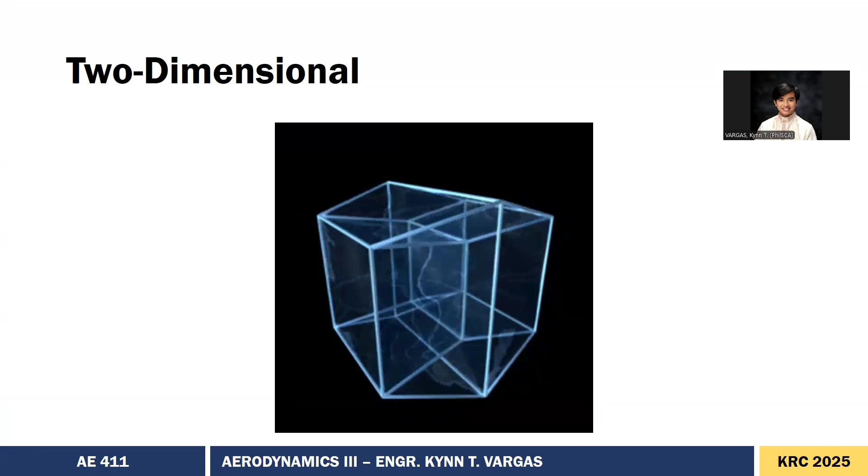So for our finals topic one, which is the two-dimensional characteristics. So what is this one? So for two-dimensional, what do we mean by that? Na-encounter na natin yun dun sa ating oblique shockwave. So, in reality, di ba, three-dimensional flow, but for simplicity, we use such theories. So, first is yung exact theory where expressions for the change in pressure through an oblique shock wave in 2D supersonic flow is generally considered to be exact. Pero meron tayong mga assumptions tulad nung dapat siya ay adiabatic, mga ganong expressions.

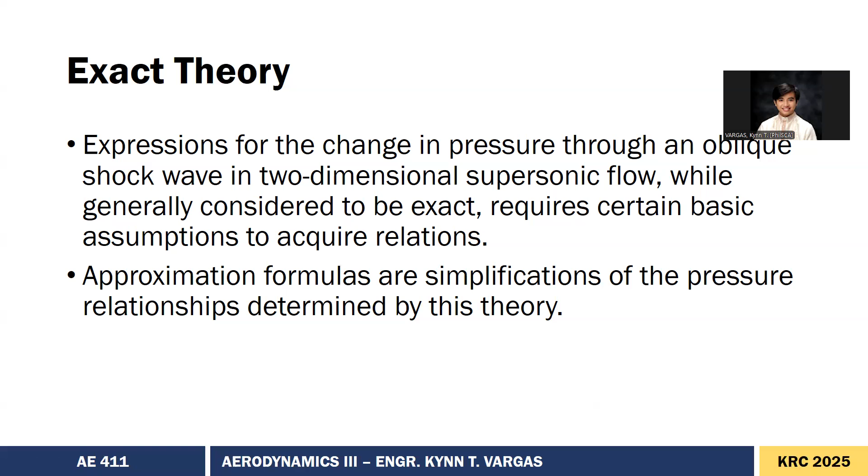But for approximation formulas, dito na papasok yung mga formulas natin for the tangential velocities and Mach and other tangential components. Whereas yung simplifications is mahahanapan natin ng some approximations. Hindi pa rin natin siya makukuha, the theory is exact pero hindi mo makukuha yung exact value. So ngayon, for the approximation theory, it focuses on the thermodynamic and aerodynamic concept, including the shock waves, Mach number, and designing for supersonic airfoils or wings.

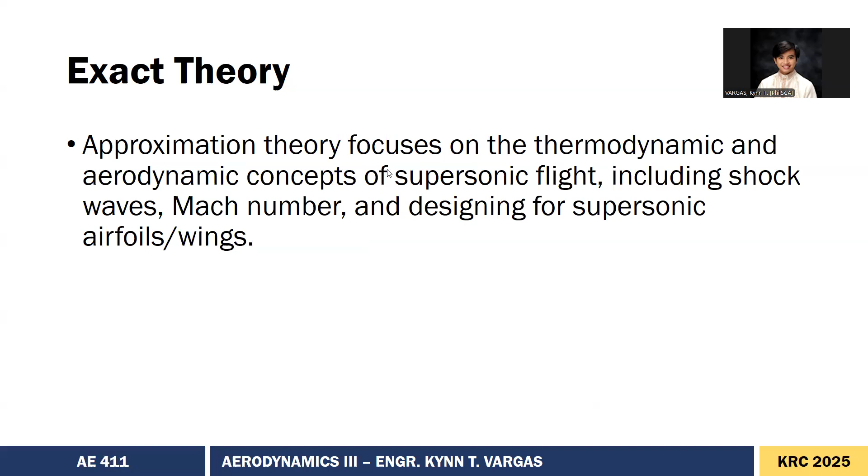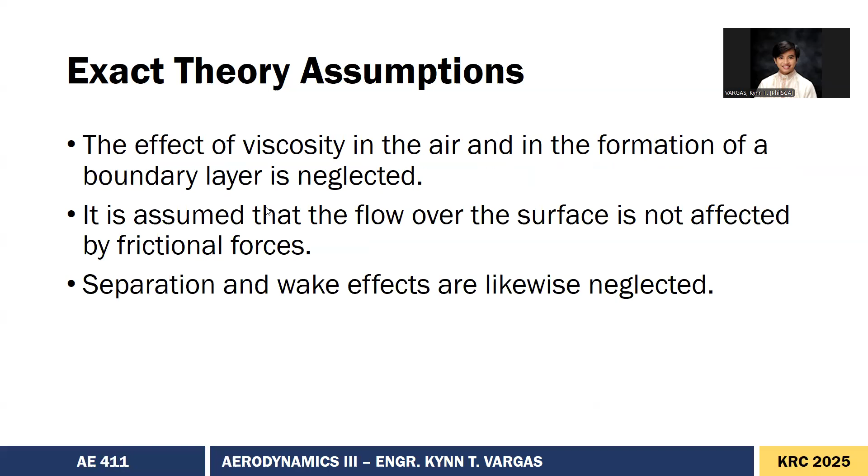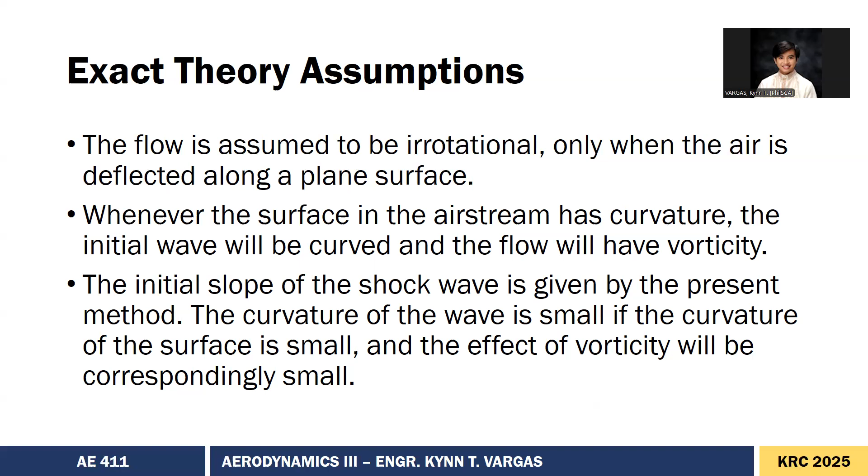Such assumptions include the viscosity is neglected, the flow over the surface is not affected by frictional force, and the separation and wake effects are neglected. Yan sa exact theory assumptions. Now, assume din siya to be irrotational, hindi umiikot, walang vortices, when the air is deflected along the surface. So, it follows the surface lang. Now, whenever the surface has curvature, the initial wave will be curved and the flow will have vorticity. And the initial slope is given in the present method, yung ginagawa natin sa midterms. And the curvature of the wave is small if the curvature is small. Alam na natin to. Intuitively, if nakikinig nung midterms, yung mga concepts na to, same lang rin naman.

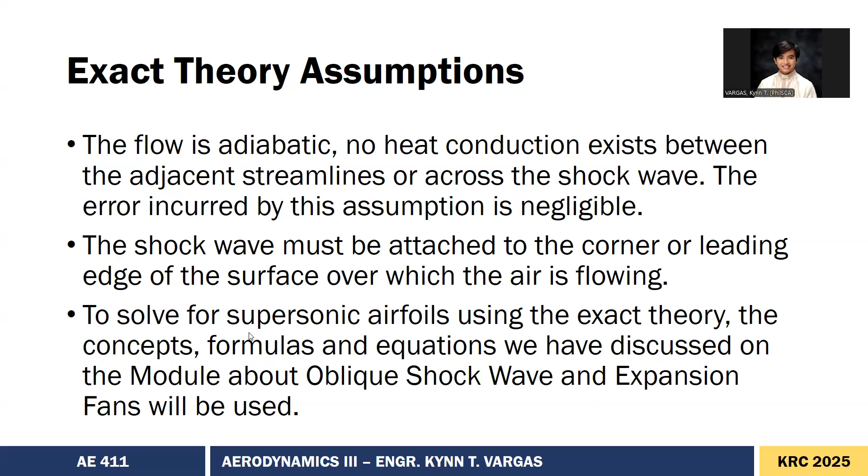Now, the flow is adiabatic. Paulit-ulit tayo doon. No heat conduction exists, pero anong meron sa isentropic na wala sa adiabatic? There's a possibility of the chemical reaction. That's why adiabatic lang siya. Now, hindi siya reversible. So, the shock wave must be attached to the corner or leading edge para sa computations ng exact theory. Ito yung sa midterms pa din. And to solve for supersonic airfoils, concepts, formulas, and equations ay nagamit na natin dun sa oblique shockwave and expansion fan. So, ano yung mga sample problems?

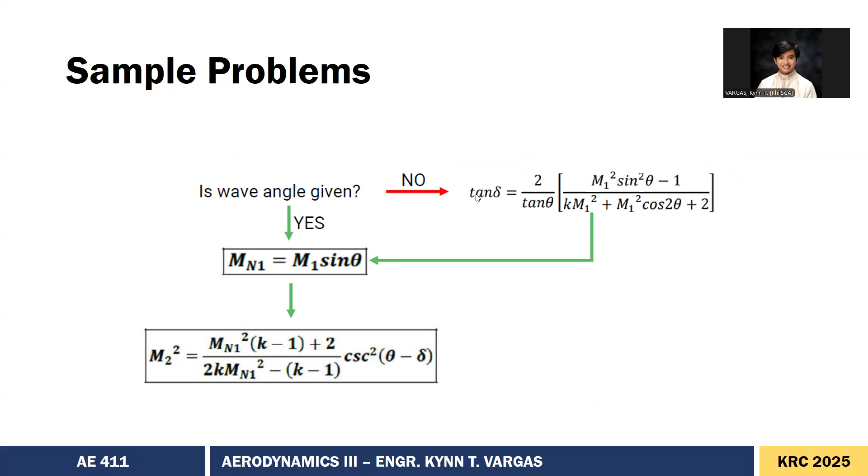Ito yung ina-explain ko sa inyo nun na pagsasamahin natin yung oblique shockwave and expansion fan. So, from here, ito yung una mo, oblique shockwave. Then mag-expansion fan ka pagdating dito sa ating diamond airfoil dito sa point na to. So, sundan na lang tong solving process na to, ito din naman yung ginagawa ninyo na. So, syempre, kunin muna natin si M2. Is the wave angle given? If no, kunin mo si wave angle. If yes, diretso ka na sa formula na to to get the M2.

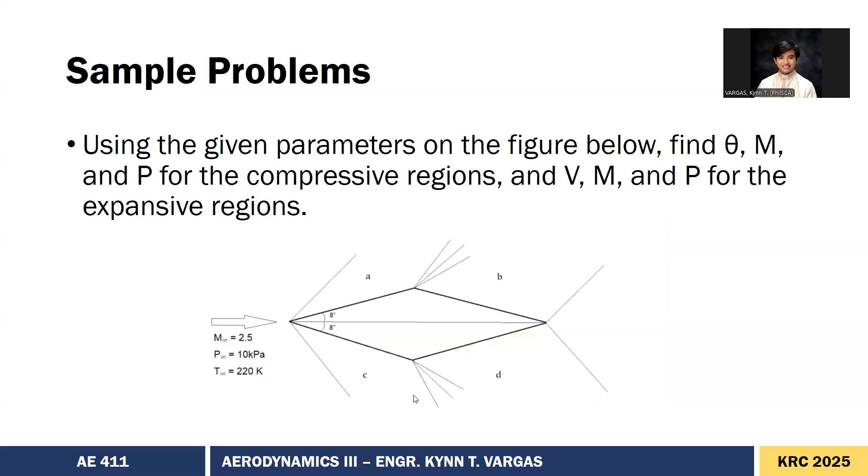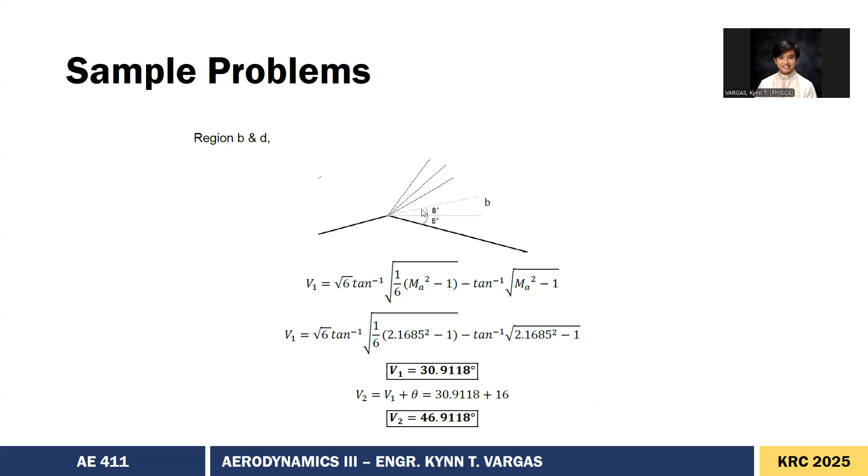Now, kukunin natin si for region A and C. Ito yun, taas and baba. Although, since equal to, parehas lang naman yung magiging value niyan. Kaya nga for A and C na. Kukunin mo muna si angle. Then makukuha mo si Mach number, si normal, papunta sa pressure, since pressure lang naman yung hinahanap. Then, not only pressure, itong MA, ito lahat na nakabox. Then after nun, ito na yung magiging ambient mo, ito na yung magiging start ng solve mo, which is yung M na mako-compute mo sa naunang oblique shockwave. Then dito mo na siya ipapasok yung values papunta sa Prandtl-Meyer expansion fan.

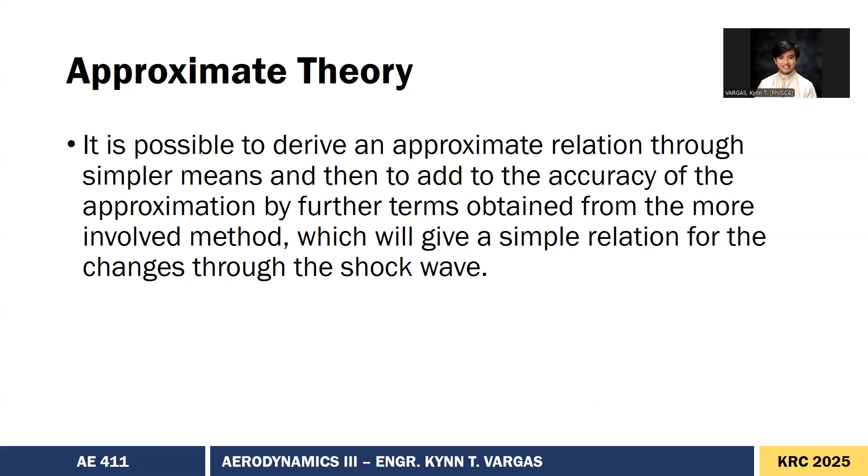So, ang kailangan ko sa inyo dito is automatic solver for calculator. Ay, for Excel. So, gawan nyo ng paraan. Nagawa na namin to before. Kaya nyo yan. So, ngayon, doon na tayo sa approximate theory, where tatansyahin na natin kung ano yung possible na values na pwede makuha kapag kasama yung mga forces na nineneglect natin. Now, it is possible to derive an approximate relation through the means of adding the accuracy of, i-add natin yung ma-approximate natin na value for that tangential component.

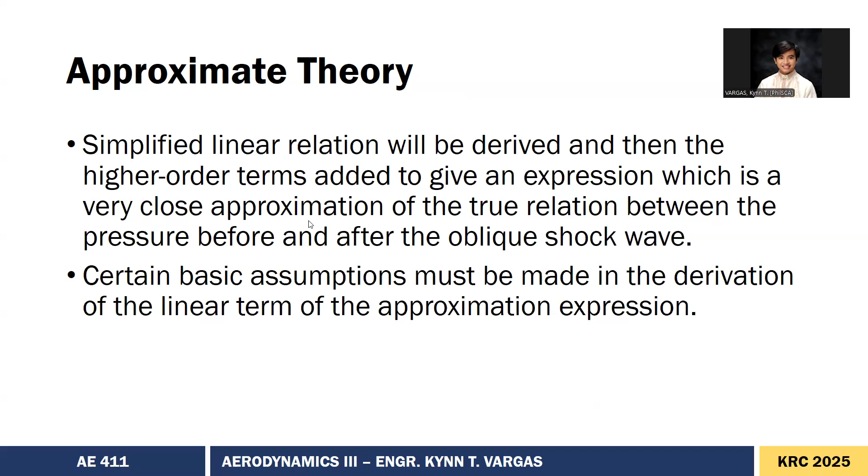So, the term detachment refers to the condition of the shockwave detachment because of Mach number being too low rather than because of boundary layer.

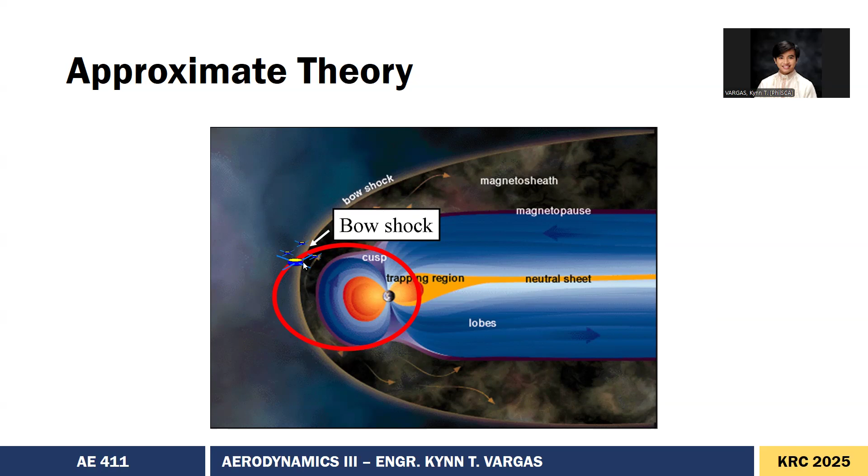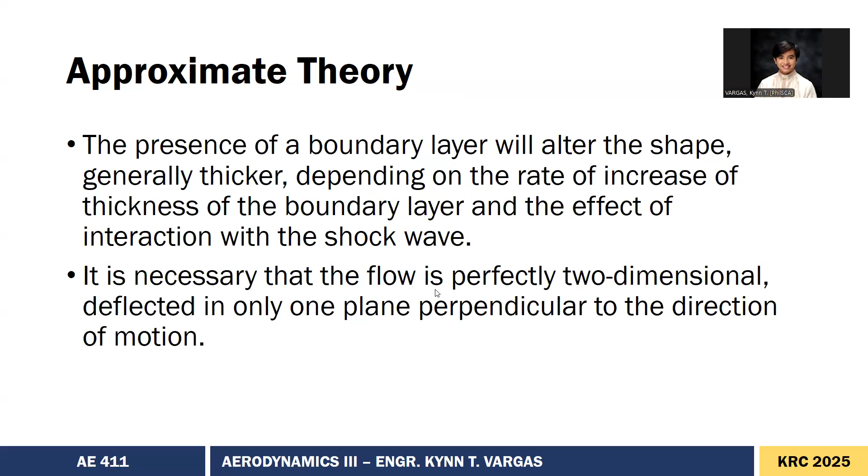So, the presence of the boundary layer will alter the shape, generally thicker depending on the rate of thickness of the boundary layer and its interaction to the shock wave. Now, it is necessary for the flow to be perfectly two-dimensional, meaning it is assumed. So, this method provides simple means of determining the change in flow conditions, particularly pressure distribution, to obtain the airfoil section characteristic, which is eto yon.

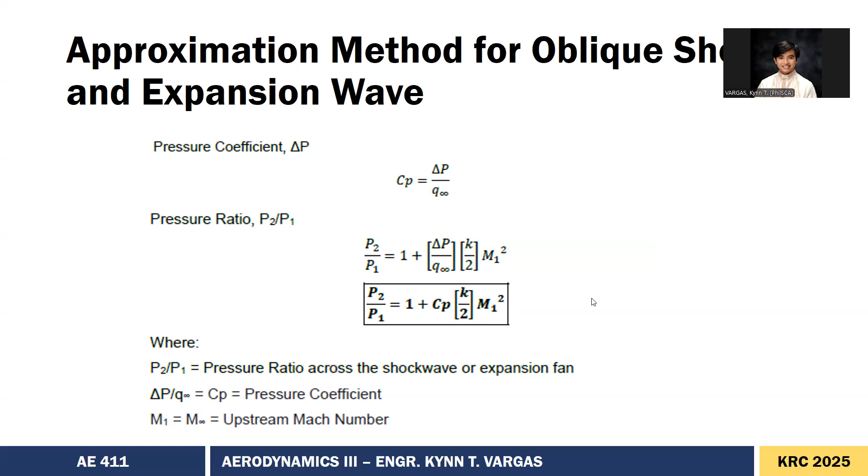Using the pressure coefficient to approximate the pressure ratio. So, nakukuha. Now, pressure coefficient determination is the first order approximation, well known to be the Ackeret or the first order theory. So, named after Jakob Ackeret, a Swiss aeronautical engineer.

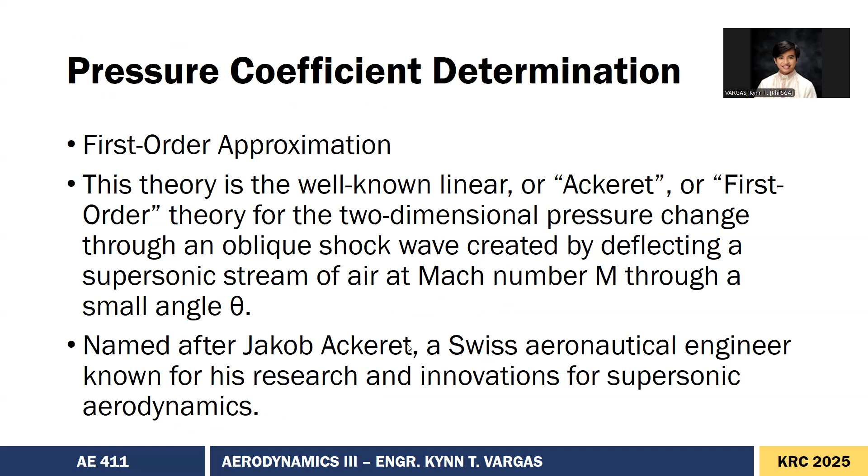So, for the first order approximation, determining the pressure distribution of airfoils at low angles of attack, walang third-dimensional effects. So, ma-define natin ng mas accurately yung mga airfoil sections which are two-dimensional in nature. So, it's derived from the compression of oblique shock wave, pero applicable pa rin siya in expansive case.

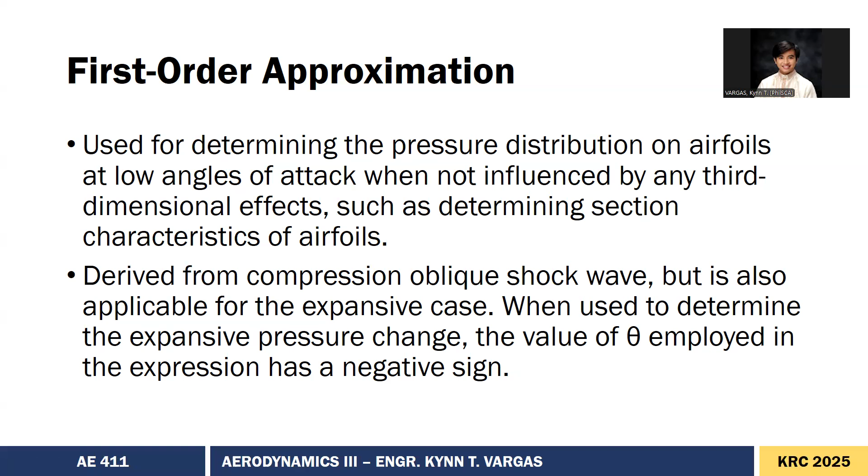So, ulitin ko, first order approximation, when used to determine the expansive pressure change, the value of theta employed has a negative sign. Na-encounter nyo na to paulit-ulit.